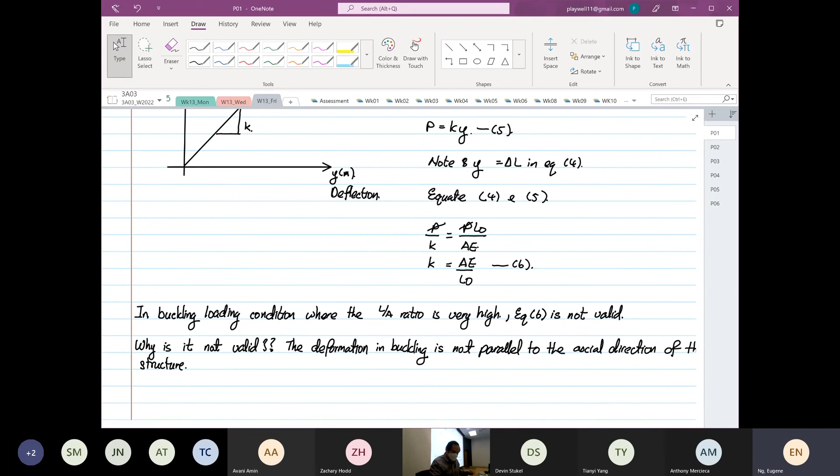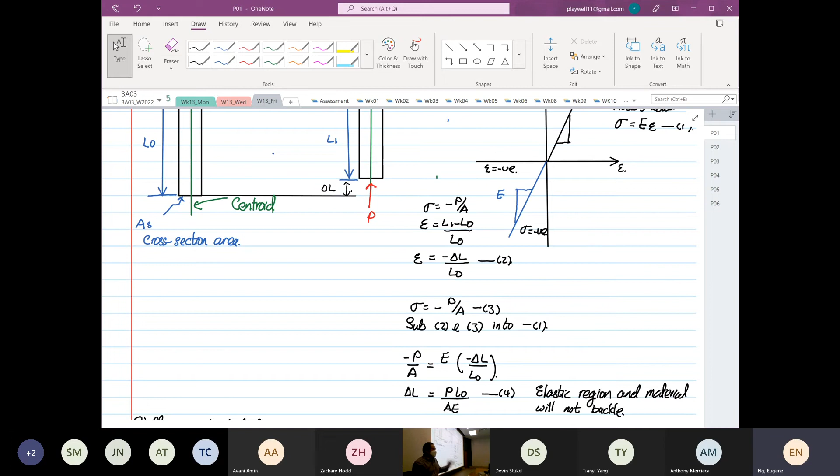So now we realize that equation 6 or whatever we applied before will not work, because everything is assumed to deform in its axial direction, right? So now we are going to learn Euler's formula, or formulation, applied to buckling.

And all this theory was developed before the 1960s. Any idea why? All these great, fantastic ideas, even computers, were made before the 1960s. Any idea why? No television. Okay, I'm serious, okay? Now we have television and internet. It's more destructive for our mental thought, okay?

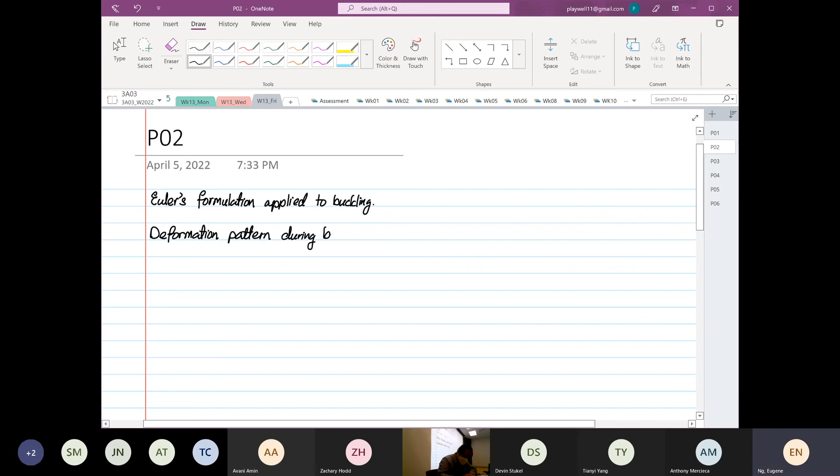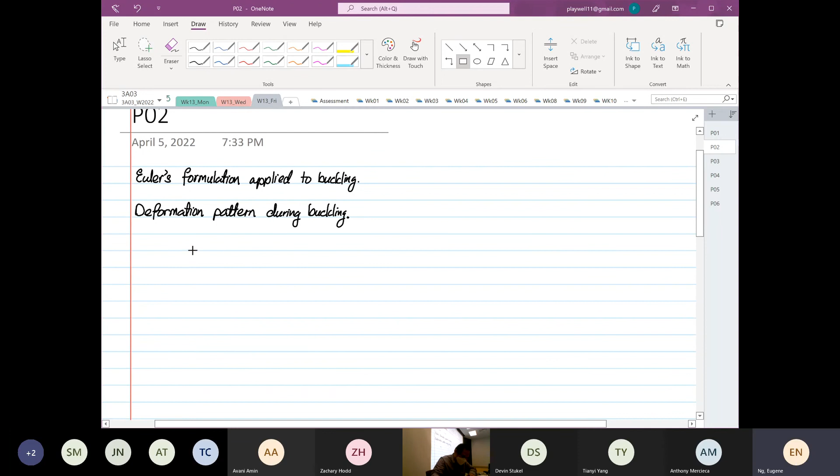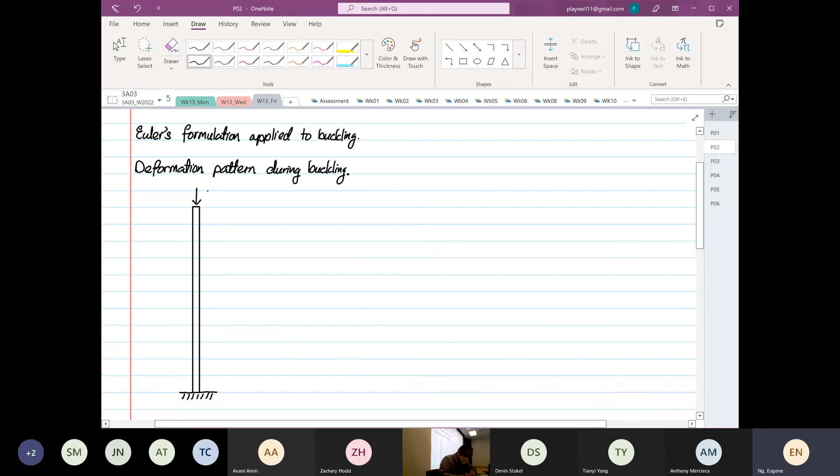Okay, so I'm going to now sketch the deformation pattern during buckling. Okay. So as mentioned before, the L over A ratio has to be very big, i.e., the structure is very long and thin. Okay. And then we have an axial load applied, right? And P is our axial load.

Okay. And now this is our original length. So this is our L0 now. And over here we have our A, which is our cross-sectional area. So if we were to look at our boundary condition, we are going to take our origin from the top. So on the top, I'm going to call this our point of origin.

Then I'm going to sketch a graph. And I think I need, yeah, this is okay. So over here, when x is equal to 0, y is also equal to 0. This is what we call our boundary condition number 1. Then our boundary condition number 2 is when x is equal to L0, y is also equal to 0. So it has to meet this condition.

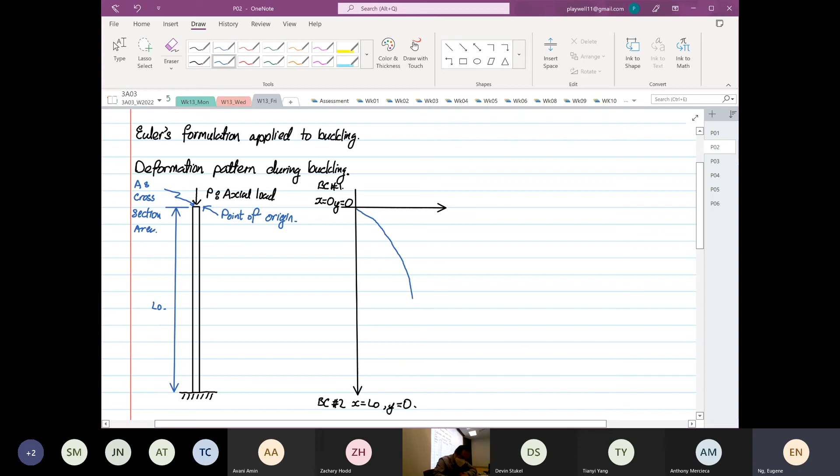So when the structure deforms, as you can see the bent region, right? We are going to make sure that it's an idealized case. Idealized case means the deformation is perfect. It looks like this. This is the assumption that we make.

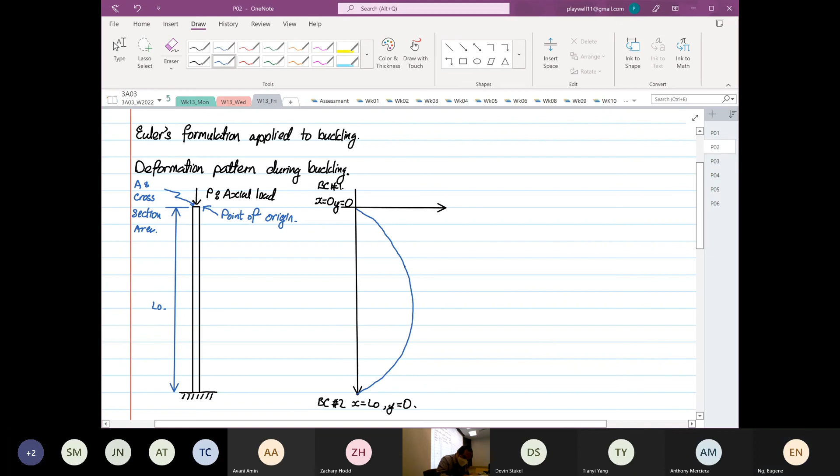So if we were to pick a point over here, this is our point Q. And the distance from here to here, from this point Q, this is our X, relative to point Q. And over here, I do apologize, I did not label this. So this is our Y.

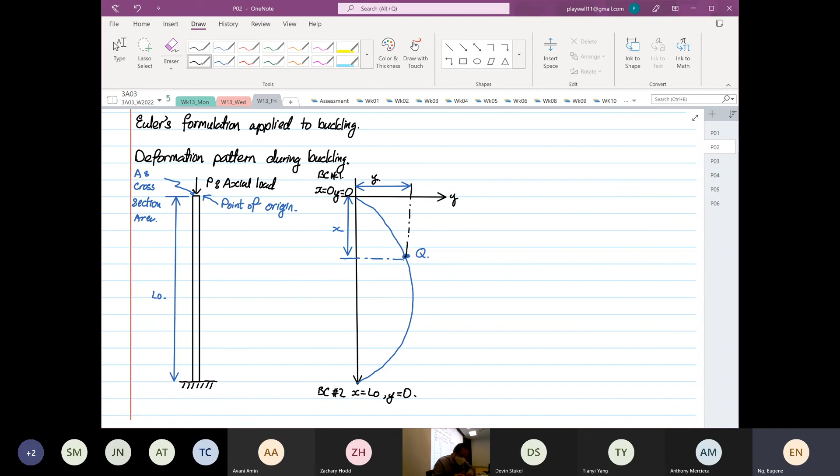So if you look at how the structure has been deformed, the deformation pattern, this is the mathematical description of how the material is deforming, or deflection. If you look at this pattern, can you think of any situation where the deformation pattern is similar but not under axial loading? Anyone? You see this type of deformation pattern.

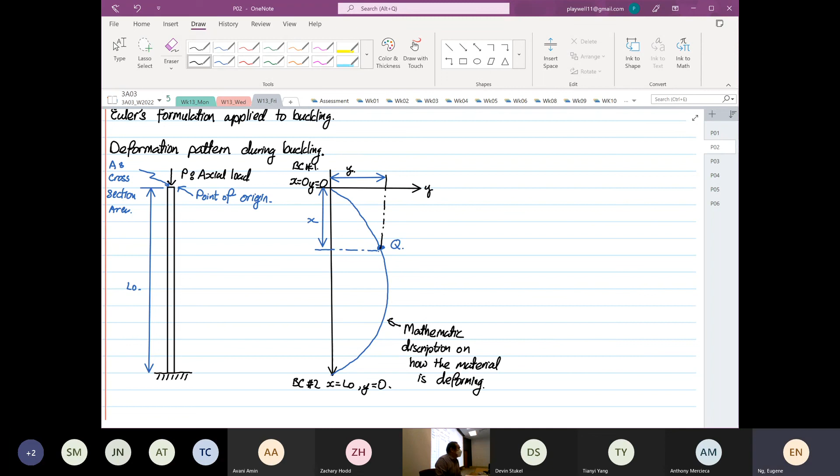In what? Yeah, bending. Well done. If we have a structure that is standing vertically, and one end is bolted in and one end, let's say, is pinned, and we apply a load P over here in the horizontal direction, our deformation pattern will look like this. And this deformation pattern is due to what? Bending moment. Yes or no?

So the deformation pattern is the same for buckling and bending moment. Now, this deformation pattern that I drew down here is idealized. In reality, it is not exactly the same, but similar. You saw how the paper buckled just now, right? It did not buckle in a perfect shape like this. It buckled more in the center first. But we idealize it. We have to somehow simplify it.

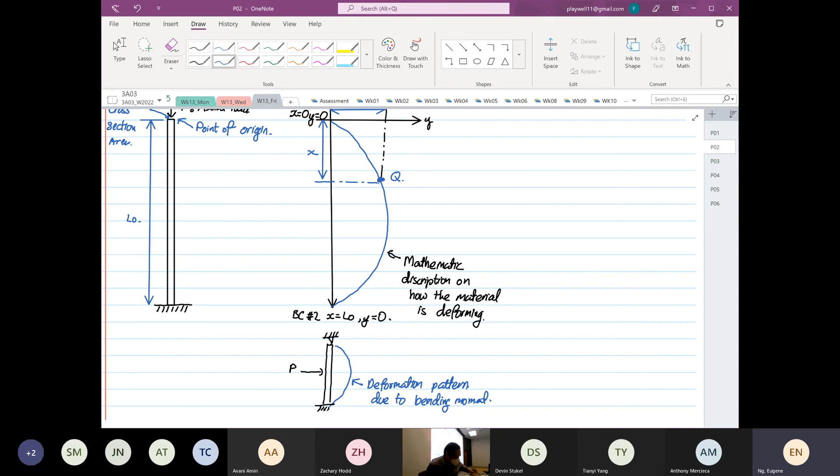So now, if we consider point Q, let's look at point Q now. Okay? Now let's consider